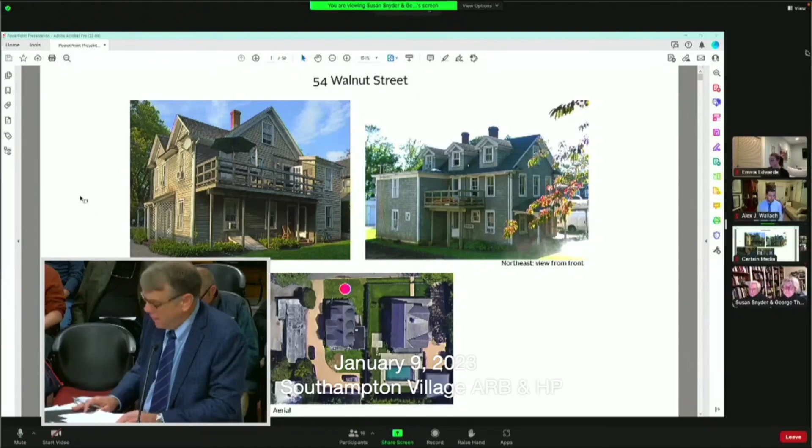We were last here in December discussing a request for a demolition. That sounds so long ago, and it does seem long ago. By correspondence dated December 5th, we had also submitted a report prepared by Civic Visions. George and Susan are here to talk about that tonight, no new information, just to present it to you.

I just want to talk to you a little bit about Civic Visions before they start their presentation. Civic Visions is a research and consulting firm that practices across the U.S., with particular focus on New York City, its suburbs, and Philadelphia. It has 45 years of experience preparing historic site surveys and evaluating sites for historic significance, with nearly 100 National Register individual and district listings. George Thomas is an architectural and cultural historian. He has a doctorate in art history from the University of Pennsylvania and is the author of 10 books, dozens of articles, and co-founded with James Marston Fitch in 1978 the Preservation Program at Penn.

Susan Nigra Snyder is a registered architect and has taught design studios and seminars for more than 25 years at the University of Pennsylvania. She's the author of numerous articles exploring the forces of consumption on urban form. Together they serve as directors of the Critical Conservation Program at Harvard University's Graduate School of Design, Master of Design Studies program from 2011 until the end of the program in 2022.

At the request of the owner of 54 Walnut Street, George and Susan have prepared an evaluation of the subject property that not only addresses the specific criteria within the code, but I must say, and I don't say this lightly, conclusively rebuts essentially every finding included in the historic analysis prepared at the request of this board. Civic Visions has concluded that the home at 54 Walnut Street does not meet any of the individual criteria for landmarking, and a demolition permit should issue.

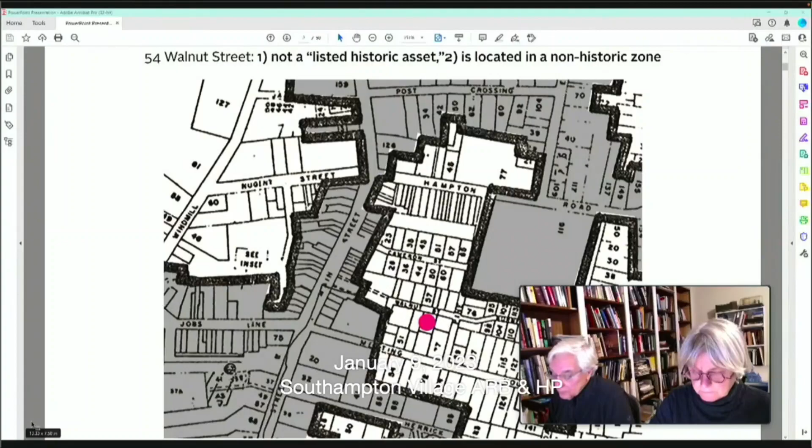54 Walnut Street is not a listed historic asset and is not located in a village historic district. The building itself is so altered that two-thirds is not original. It lacks integrity, making it unsuitable for preservation. 54 Walnut was designed without style and is not Queen Anne or any other style.

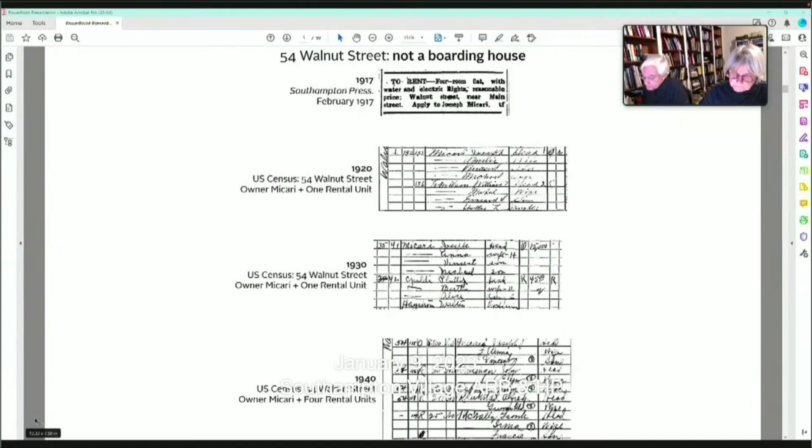Contrary to the assertions of the town report, 54 Walnut Street was never a boarding house, nor was it built as multifamily housing. As you will see, A.M. Havens had nothing to do with the design or making of the building and did not live in the building. In fact, it was the work of another builder who sold the house to Havens.

The completed house was purchased by Havens as a short-term real estate venture. Havens himself was a minor player in the local building world, a hired hand for the first half of his career, and only later took on the contractor role. The Havens family was one of numerous Southampton families buying, subdividing, and selling property. Their work has no special character that sets it apart.

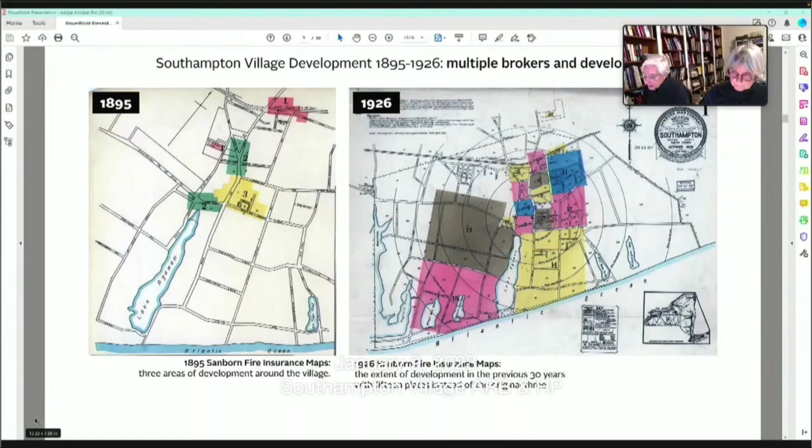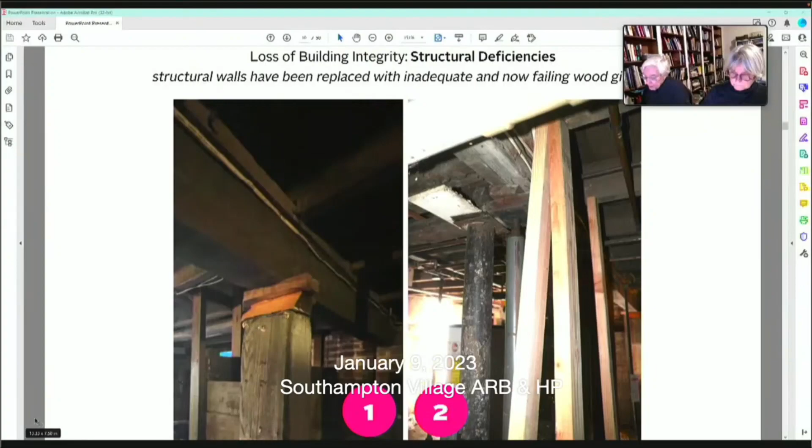Finally, we will point out an issue that is not visible from the street, but should be known to the board. The building has severe structural deficiencies, largely due to the inadequacies of the construction of the additions that undermine the building.

To summarize our introduction, this building and the people around it do not meet any of the significance criteria of the Historic Review. These standards come out of the National Register standards and demand superlatives. The design character of 54 Walnut must be special, whether historic or aesthetic.

Persons associated with 54 Walnut have to do more than exist. They must have made a substantial contribution to the history of the village. The design characteristics must be distinguishing characteristics of the style, that is, the characteristics by which we recognize the style. And finally, 54 Walnut must be more than simply a work of a designer. The work has to have significantly influenced the town, so clearly that we would recognize the designer.

Just a few words before George and Susan continue their report in terms of the standard. The core of this house, we talked about a core of the house and then some additions. Well, indeed, the core of the house is not worthy of preservation.

Havens, assuming he rises to some historic level, which I find fanciful, didn't design, live in, or own for more than two years this house. Nothing historic that he did, assuming he was a historic figure, which he is not, took place in the house. He owned it for two years before he sold it.

The Spanberg report is full of legal and factual leaps that don't hold together. The report tries to paste together a contributing structure by pieces of supposition, unfounded, and indeed now unproven leaps and claims that have no nexus to the categories required for significance. Statements in the report such as 'in all likelihood' are simply not allowed to create a rational basis for legal actions. If you like the house, I understand that.

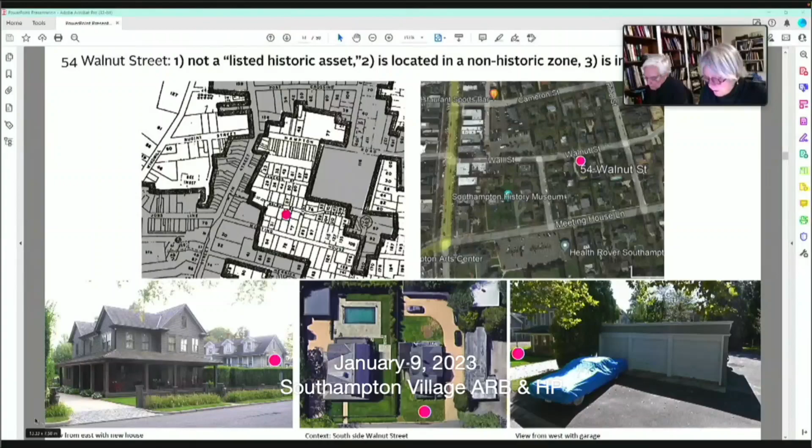The building has a lack of architectural significance. Most critically, 54 Walnut has been so extensively altered as to have lost even the design integrity of an unimportant building. We can see the totality of the alterations in this sequence of slides.

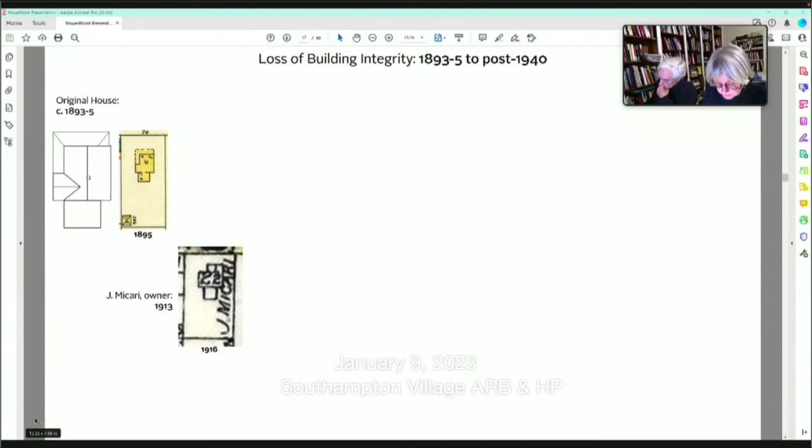The original house consisted of a front portion with an inframing porch and a rear room. The Sanborn Atlas shows it as 2 stories, meaning the attic was unsuitable for living. When it was acquired by Joseph Micari in 1913, it was still as originally built, as seen in the 1916 Atlas. Micari, to increase its rental capacity, added a large rear wing that covered the rear facade and removed the rear room, adding a third to the volume.

We can see from the census page that there are now 2 families living there. The vertical break in the facade, seen in the image below, shows evidence of the doubling of the large volume and the covering of the rear wall.

Prior to 1940, he made another large addition on the side and dramatically altered the roof, adding oversized dormers so that the attic could be used as rental space. This meant that by the 1940 census, the house contained 4 separate units. The new volumes were all textured shingle, abandoning the straightforward original clapboarding.

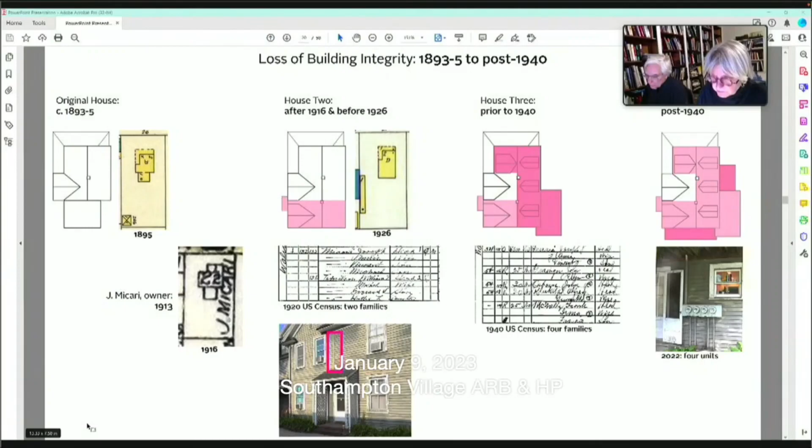Since then, the house has continued to grow and be enlarged with exterior decks and other structures extending the building footprint. The result of these alterations is a building whose facades and volumes have been so altered that the integrity of what had been a simple building is lost in a welter of volume and new material. As a much altered minor building, it does not achieve the required architectural significance.

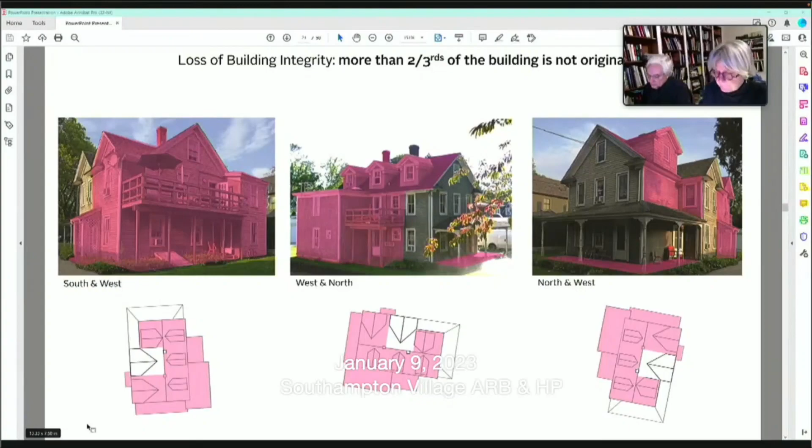The visual comparison of 54 Walnut with even modest Queen Anne cottages in the vicinity shows how unstyled this house is. As you can see in the top images, 54 Walnut has no decorative beam ends, no textured shingles in the gable, no decorative verge boards lining the gable, nor, as you see in the bottom images, does it have the characteristic Queen Anne window sash or projecting bays, towers, and other volumes. A gable end toward the street with a porch is not Queen Anne. It would be more appropriate to term the building as having no style.

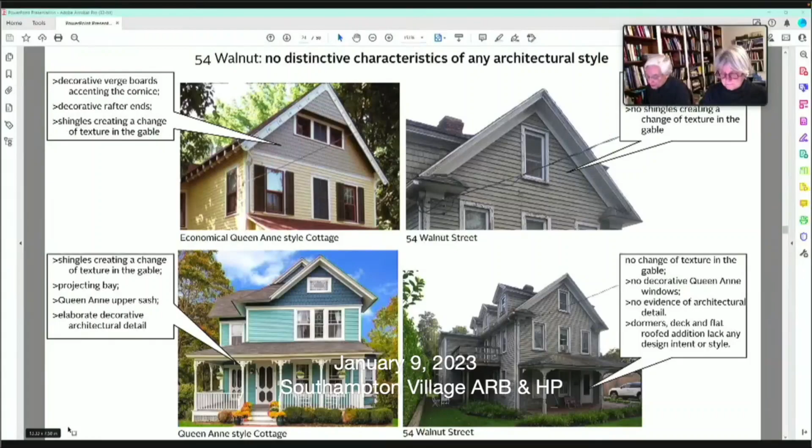The next question raised was that this was a boarding house, and that boarding houses were an important building type that had disappeared. It is claimed that 54 Walnut has significance because it was built as a boarding house. It was not. This claim is readily disproved.

As the census demonstrates, 54 Walnut has no long lists of boarders in any of its census records. 54 Walnut was not built as a boarding house, and it never served as one.

54 Walnut is not an example of the work of a designer whose work has significantly influenced an age. In fact, there is no documentary evidence that it is even the work of A.M. Havens.

Comparing the dates in the chain of title and published records of mortgages with the October 1895 date of the published Sanborn fire insurance map—let me move this so you can see it. How's that? Okay, see the 1895 date there.

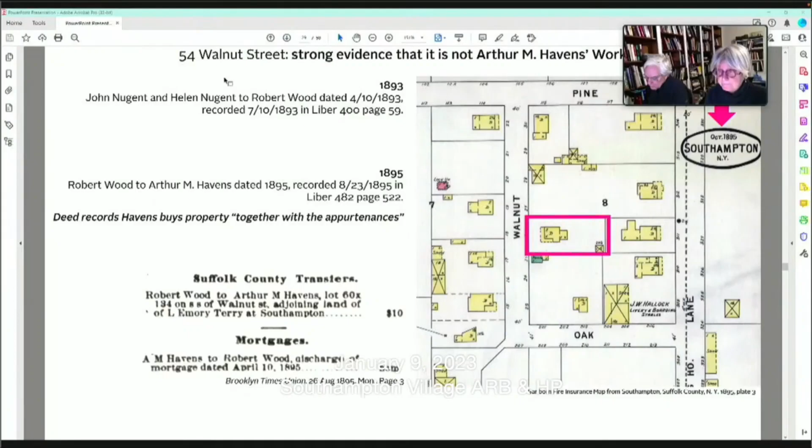John, how much longer is this presentation? I'm going to ask that brevity become your friend here. We're taking a lot of time. Probably 10 or 15 minutes. We don't have 10 or 15 minutes. Can you do what you can do in the next 3 to 5? We've already had your paperwork, and our job was to read it, and this is going very long. So if you could just figure out how to wrap it up, that would be great.

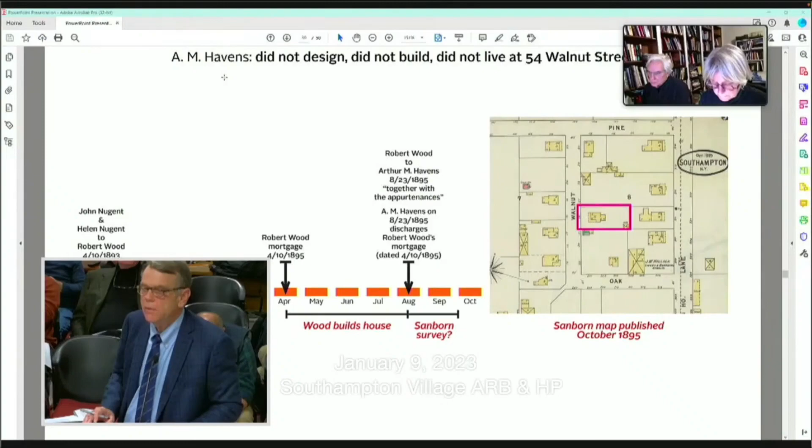Well, I understand. The issue is this facially just doesn't meet any of the criteria, and I think it's important that the experts be heard. But John, are these able to substantially expand on the arguments you made at the last meeting? These are coming out of two very credentialed people's mouths. I understand that. I'm going to ask you if you can give us the most salient facts in the next 3 to 5 minutes and then wrap up. George and Susan, if you could try to do that as quickly as possible to accommodate the chairman and the board, that would be helpful. What we'll do is we'll just submit the script, since some of this is redundant to what we heard last meeting and we've read all your paperwork. Great, thank you. George, Susan, if you could accommodate, that would be great. Okay, we will try to do that.

You can see the discrepancy in dates shown on this chronology. It is really difficult to imagine that Havens would be able to buy the property as an empty lot in late August, build the house, have the Sanborn survey it, go to New York, publish it, and issue it in October. So it is very, very clear that Havens did not build the house on the site.

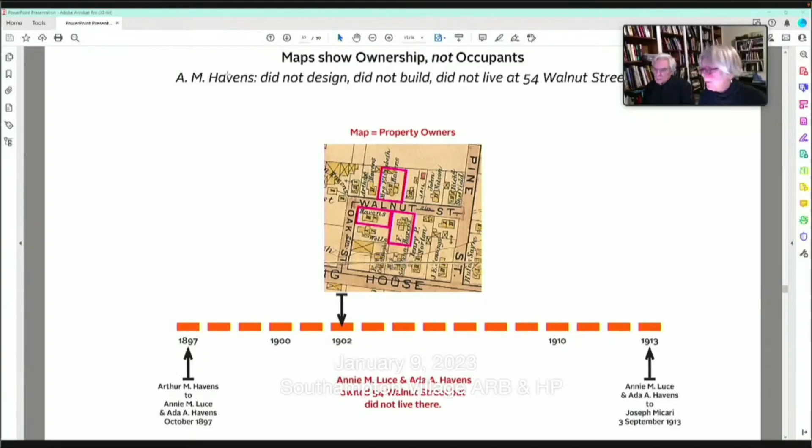That's important, because one of the claims was that Havens designed and built the house—it's gone. One of the other claims is that this is a Havens block, based on the idea that the map of 1902 shows the Havens name. We want to point out that map is about property ownership, not about residence.

The three sites outlined in red here are all rented sites. Havens lived across the street, his mother lived with him, and all of the areas labeled Havens were occupied by other people. This is ownership.

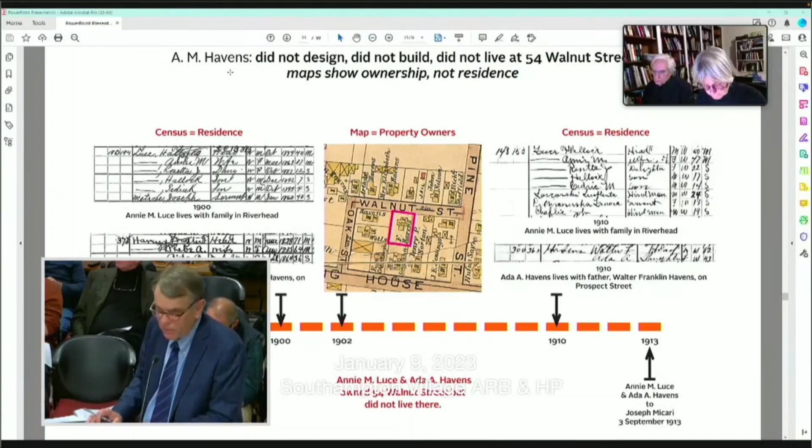Just trying to truncate or move along. The Havens bought and sold property. They weren't designers, they weren't architects. We've already covered this before, ad nauseum, and it's in your lengthy paperwork. Is there anything new that we haven't addressed in the past three meetings on this?

Well, what we'll do is we'll submit the script. You have the report. George, Susan, I know it's difficult. You have a very thought-out presentation, but if you could summarize in the next minute or so the lack of any sort of architectural significance and the lack of any historic personage, that would be great.

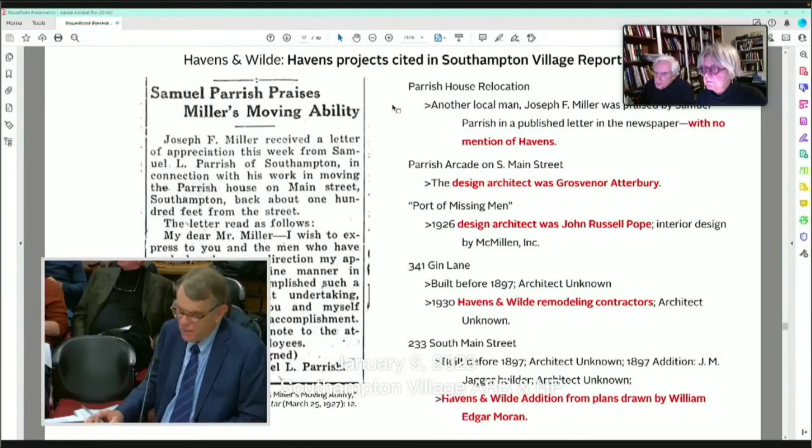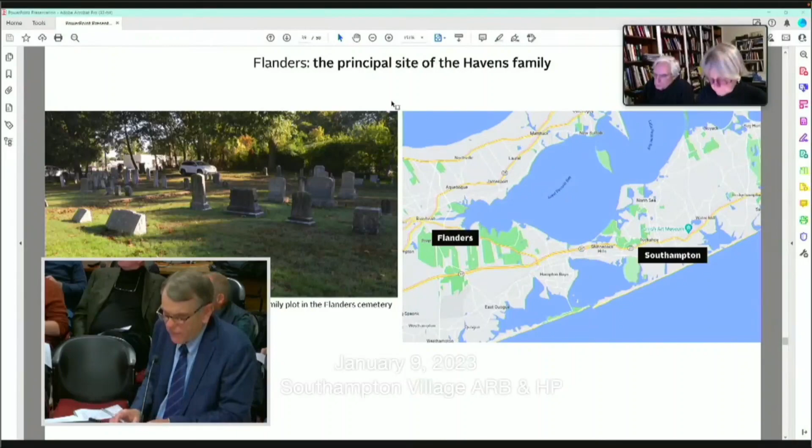There's some mention of him having worked on Port of Missing Men, a wonderful John Russell Pope building. He worked there, a lot of people worked there. It's a beautiful place, I was there last weekend. But it doesn't mean anything other than he was maybe a subcontractor, with no help in the design of it. It's really whole cloth, this report.

But in any event, we'll submit the script. What's your pleasure? We'll submit the script. Do you have any further questions about this? Let me turn it over to the board members. Do we have questions, or comments? I have a couple of comments, a few things that I picked up.

You said that the house has been greatly altered. You mentioned that two-thirds of it have been altered, which by simple math means that one-third is still historic, or at least dates back to 1893.

So there is some partial historic value, or elements that are intact. Then you mentioned that it has no style, and that any appellation of a style would be arbitrary. But a statement that it has no style is equally arbitrary. I'll admit it doesn't have a consistent style, but there is a style. So I come back to one of the sections in the code.

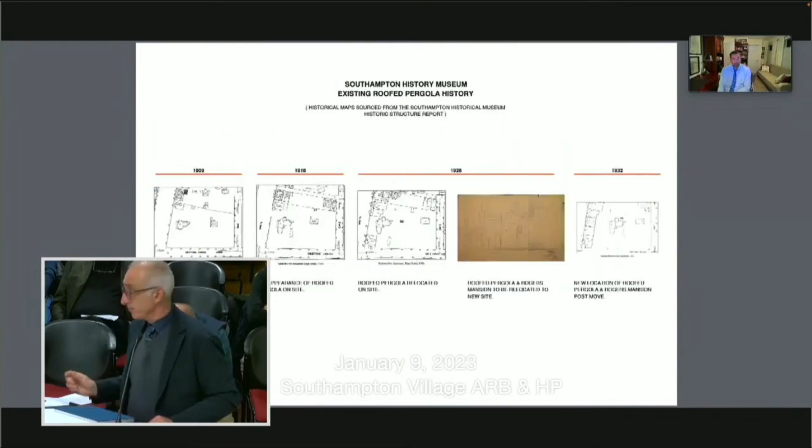And if you could go ahead on that. These are actually historic plans showing the building being moved from Main Street further into the property, and at that point the pergola that still exists today also existed, and it moved with the house.

There's the pergola. It basically has a function—we have various activities. Connor, one of our historic museum members, is very active in having various activities with the schools under this existing pergola.

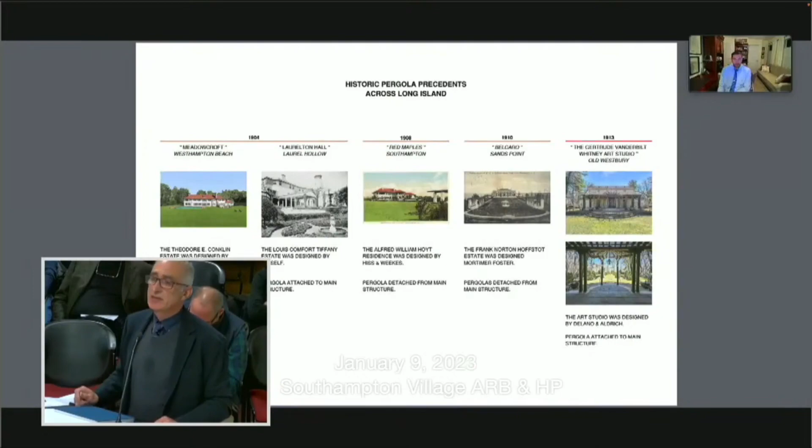These are some precedents from Long Island, primarily buildings of the early 1900s and the relationship of pergolas to them. This was a very common feature of houses of that time and region. I'd say about 60% of these properties are in Southampton. I can walk you through them individually if need be. No, please don't—let's go ahead. We've read through it and we understand.

Yes, so the existing site plan and proposed site plan show the pergola on the north side at the top of the property. If you could go ahead on that—there, you can see it right there.

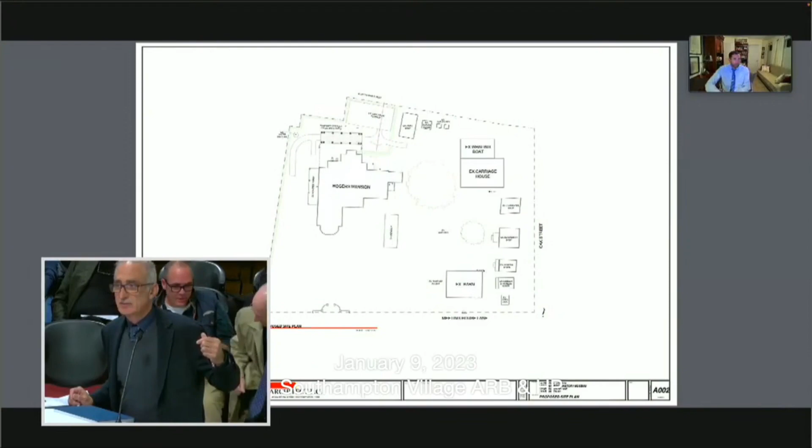I remember from last December when we did this presentation, the issue was that you guys had already built what was called proposed, and the sidewalks and brickwork to be covered by your new pergola already exist. Correct, it already exists. So the real question doesn't become about elevations or proposed—it becomes about this pergola specifically. Correct. Okay, if we go one more.

I want to show you—keep going to the elevations. So this is the existing west side elevation with the pergola. You can hardly see the pergola here; it's on the left-hand side in relation to the building.

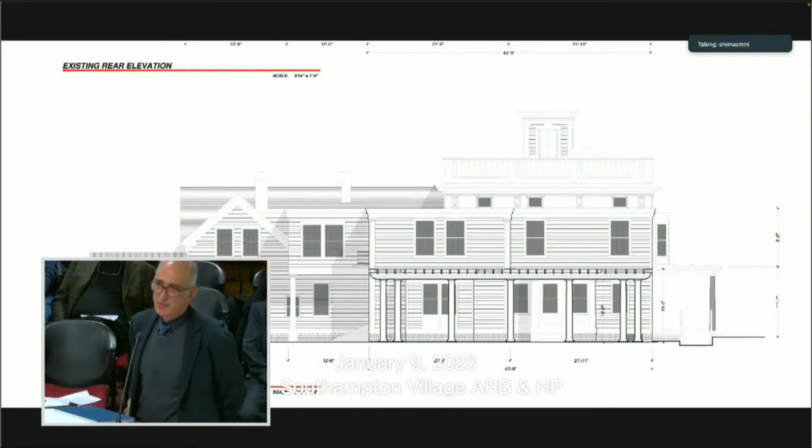Can you take us through color and materials, please? The top is cedar, and the columns are polystone—those are the pergola's finishes. We're not painting the cedar; it's left natural. That's about as far as the materials go.

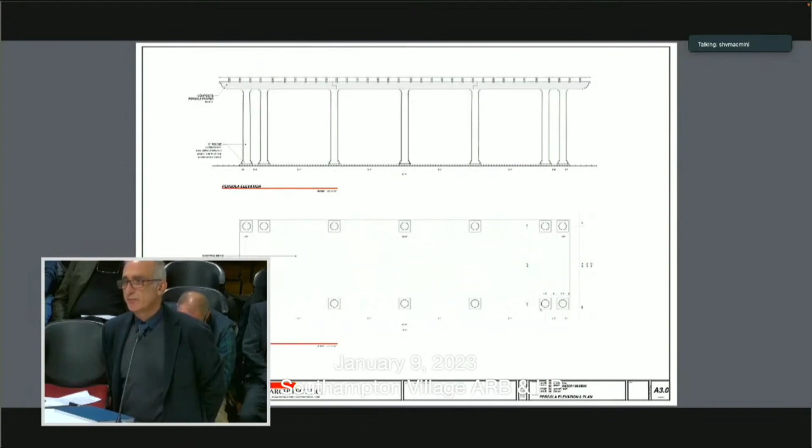On the brick paved walk, we're introducing minimal lighting—just 4 downlights in each of those bays. I've submitted specifications on those, which adhere to night sky restrictions, primarily lighting up the path and nothing upwards. Okay, hang on.

And the joists, what's the material for those? Again, plain cedar. Plain cedar, okay. Everything cedar. Okay.

All right, I'm going to turn it over to board members for comments or questions now, since we went through this in December and were looking for additional information. Board members, do you want to start? No questions.

Yeah, I still object to the pergola. At the last meeting, the representative of the museum basically said the purpose of installing the pergola was primarily for commercial purposes, in order to maintain the viability of the museum. And in my view, commercial needs take a distant second place to architectural criteria.

So when I look at this pergola, it's a good 60%—I know you showed the drawing—but it basically goes across the entire main part of the building. There's a wing to the east, but it covers the main portion. In terms of the entire frontage, it represents about 60% of the length of the house, and to me that's more than a casual pergola for sunning or whatever.

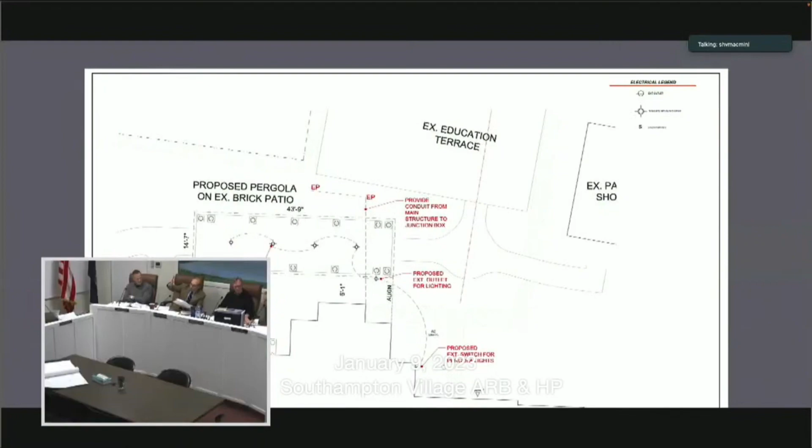So I don't know if Charles can pick it up anymore, there are no more cameras here. But on the layout, the house on the northern side of the Rogers Mansion, along the alleyway that goes between St. Ambrose—there is a square, already bricked, maybe 20 by 25.

Not the proposed terrace, no—it already exists. Okay, so what you're saying is you'd be happier if we moved it to the existing terrace, to pull the pergola farther away and design it as a unique structure versus mimicking the history in front of the house. Right. Thank you, that's a good summary, Mark.

No, that's a question. That's why he's chair. No, that makes total sense to me—let me propose that question to you.

Because it does feel like we're taking an existing element from the '20s and just repeating it in the back, but you have another opportunity—your existing terrace, which is actually wider and has more square footage. Is there a reason why the covered area for entertaining and commercial purposes couldn't be pulled back farther from the house, over the terrace, versus where you've located it? Yes, there is.

To go back to, even though this is not the purview of the board, the function and use—specifically calling it commerce—our commerce at the Southampton History Museum is history. We have various events going on as far as educating the public, students from all different ages, and each of these courtyards has been designed for specific activities. Yes, we have different events two or three times a year where larger parties or galas are invited, but between those we have extensive activities, primarily school activities, contributing toward education of history. Each of these spaces is defined based on those needs and sizes. If we were to move the pergola further north, we would be eliminating the capacity of that space up there.

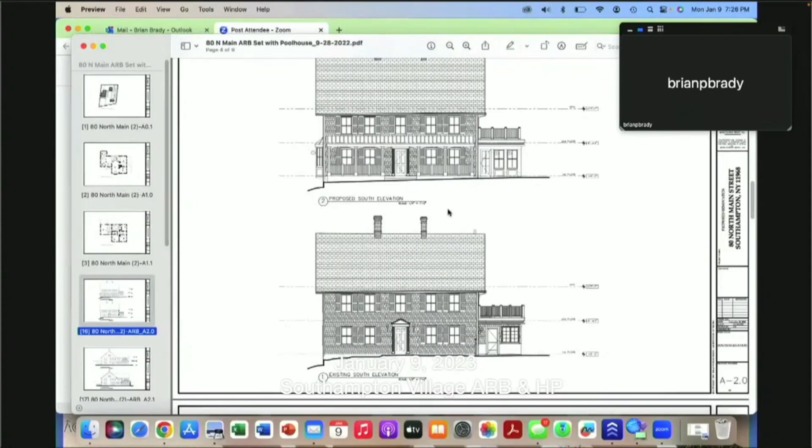This looks like the original proposal. In Sally's report, she had a major objection to this front porch because it was added at a later date than the original house, and given the original house's orientation, it would never have had a porch on the south side. So we agreed to remove it, and basically we're back to this being the front facade.

I just want you to know that all the windows in the house, there are some that are very, very old, and just a few, and then there are some old windows, and we're trying to reuse every window that's there.

The shingles that are there, we're hoping to reuse. We found some evidence, and Chris Gaynor, the builder, is here and can talk more about this if you're interested, but there's evidence that the house was originally painted white. So we're proposing to return the house to white, with the original shingles matched where we need to, and take it from there.

You can see on the front facade here, this area was a bad little sunroom that was added on. We want to keep the actual mass of it, but clean it up and make the windows actually match the windows on the front facade, and redo the railing. Right now there's a stair going up to it, which we'll get to at the next elevation.

Do you have a plan to build out that pediment opening, or does it stay flat to the front facade? Right now it's old, it's there, the door needs to be replaced. We're trying to work with it, want to keep it simple. If we can work with it, we will. If not, we're going to do something along the same lines. Great, thank you.

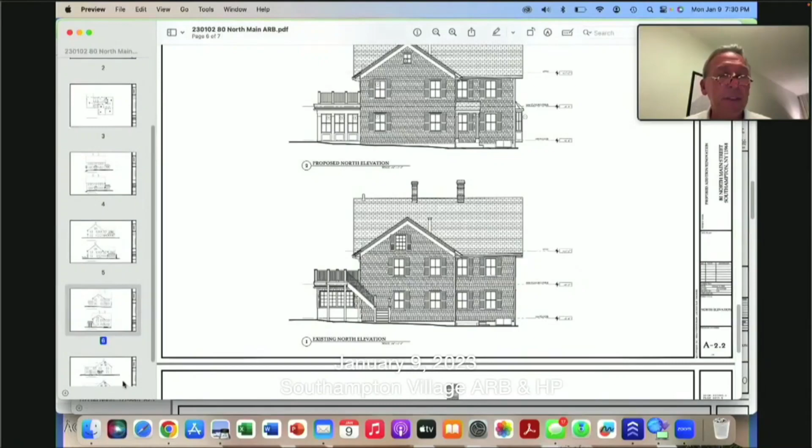This is the North Main Street elevation. These windows, although very old, obviously were added at some point. It kind of looks like a storefront from North Main. So what I'm proposing, since the address is 80 North Main and this is becoming the front of the house, is to take these 4 windows and turn them into a bay, which would reduce their mass. They are old windows and I'd like to reuse them, then create just a small, simple porch for this area.

These days we all get packages, and this is where they'll all come. So we want to have some sense of a covered area since we are removing that porch in the front. Everything else is basically staying the same.

The 4-window gang on the existing north elevation that you want to make into a bay—could you tell when you went through the house that those are original in that configuration, or were they altered over time? They were altered over time. I would imagine there was just one window there originally.

In Sally's report, she had no objection to that conversion—no objection to the bay or the porch. Her only comment was she was fairly adamant about the attic windows remaining as is. Considering they are the original windows, I think that's worthy of consideration. They should be repaired in place as they are.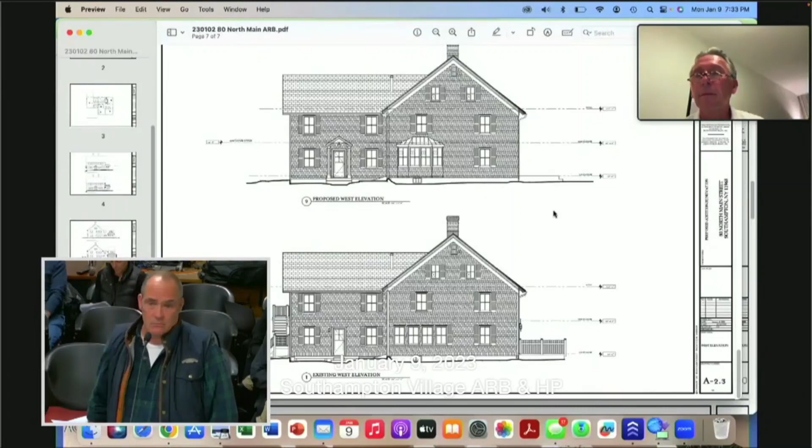May I? Chris Gainer, C. Gainer Construction—I'm a preservationist by definition. I can say that given the age of this house, if you want to see the shutters, take a look at the Halsey house on South Main. They were probably wood, board and batten, nothing to write home about. As the Charles Halsey family progressed in stature, they made changes to the house.

Eventually—it's kind of funny, earlier Havens and Wild was mentioned—the Wild family lived here and made a lot of changes to the house as well, and the Duriers. So I can say that those 4 windows in the front were added during the Havens Wild time, and the attic windows—actually, I was in the attic with Sally when we discovered the age of the windows. They will go back to my shop. If they can't be salvaged because of rot or whatever, they will be recreated perfectly and reinstalled.

I did this in a house in Sag Harbor a couple of years ago where we took every window out and turned the library into a window factory, and we rebuilt them, and nothing changed other than the fact that they worked.

So would board and batten shutters be consistent with the original look? I don't think so—the problem is the house has changed in look drastically. I don't think putting it back to the way it looked when it was built originally would be appropriate. The shutters would have been very rustic, more for protection from wind than decorative. That's why I think having working shutters on a house of this age would be appropriate instead of just an ornamental shutter.

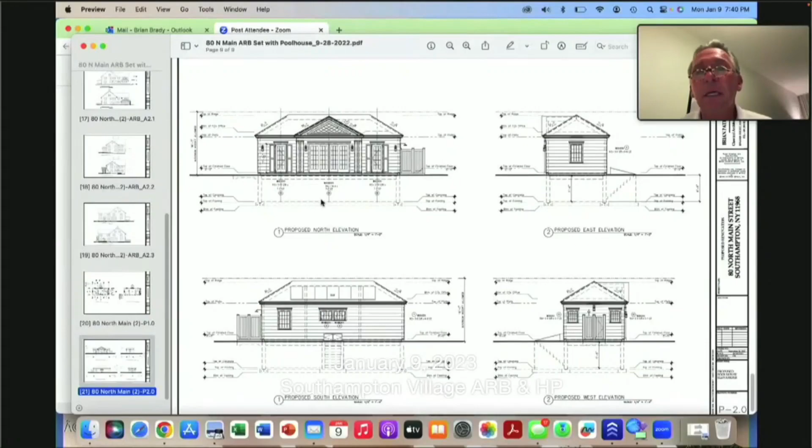Do you have a hip roof on that house because you're up against any kind of pyramid situation? Yes, we are, but it was also done to try to diminish the mass of the pool house. I'm trying to keep it as simple as possible. If I just did a gable roof on there, the mass would get a little bit bigger.

All right, board members, additional comments?

I don't know, the more I look at it, keeping the original 4 windows, or what would have been the 4 windows on the west elevation - some might say that lacks any design or style, but I think it's more in keeping with the history of the building.

Jane? Yeah, I would agree. I find the bay window somewhat offensive, just tweaking it into something it's not. I also want to mention that if it was originally painted white and you want to go back to that original, let's find out what the original shutters were, because I think the black and the white looks really modern.

The black shutters with the white - do we think there's any shutters of which a scrape test could be done? Those aren't the original shutters. They're not the original shutters. Not the originals. Okay, not original shutters, and there's no evidence that there were shutters when the house was built.

Jeff, anyone else? Okay, before I go to public comment, I would say if we follow the rule of trying to honor the original window openings, I think if we took the bay window out and back to the original openings, it would be more akin to the actual history of the house. Other than that, thank you for removing the porch, because that was my big objection as well, Sally aside. And I think you've done a good job of taking the pediment front of the house and adding the side door to reorient the front of the house.

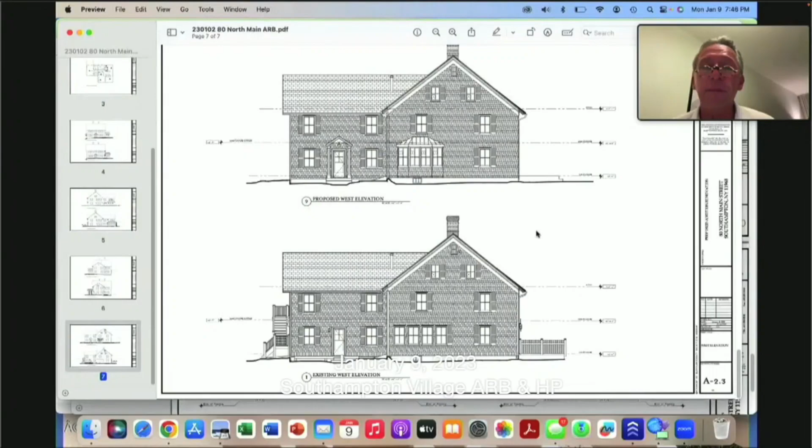If you could find out for us when those 4 windows went in, that would be useful too, because it could have been 1973 or it could have been 1910, we're not sure. The windows are much older than that. If they're much older, it'd be helpful to know if you could just estimate, because then they become part of the architectural history of the house. We'd like to take that into consideration.

So I move we accept the applicant's request for an adjournment. Do I have a second?

Second. All in favor? Did we ask for public comment? I think we did. Okay, sorry. All in favor? Aye. Thank you, Brian. Okay, thank you. Did you vote, Jane? I did, yes, I did say aye.

I can't hear her. All right, before I do that thing that I always do and file away my agenda - her mic needs to be closer. You're not used to us.

All right, so I believe next we are up to 99 South Main Street, which is the demolition of an existing house and pool house, and the construction of a new house at 99 South Main Street. That she's not voting - because they can't hear her. Good point.

Is the applicant here? Searsucker 3 LLC. You need help, Jeff? You got it, I need help. I can get by. Are there any hands in the back? I think the architect's on Zoom - oh, there he is, okay. Hi, if you'll state your name and introduce yourself, please, and then we can go through your presentation. Frank Greenwald, architect, 295 Main Street, Sag Harbor, New York. I'm the architect for the project.

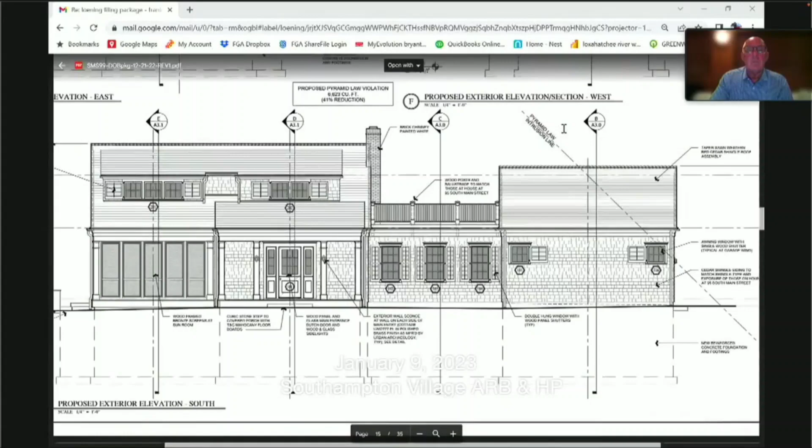Okay, board members? That is my recollection. I also believe at the last meeting you hadn't actually done the application for demolition, wasn't that correct? I think that's correct, yeah - now we're applying for that, the application for demolition did come through. So my recollection is that was the one issue left outstanding. For my new board member, Jane, did you have any questions? I think it was going to be the same footprint as the house that's there? Yes, same footprint, correct. Okay, any other questions? No, I'm good, thanks. So I'm going to move, since they eliminated that issue.

Is this a certificate of appropriateness? Yeah, written decision. I'm going to move that we - do we need public comment? Oh sorry, public comment - we do, I forgot about it. Okay, then I'm going to move we close the written record for decision on 99 South Main Street.

Do I have a second? Second. All in favor? Aye. Great, thank you very much. Thank you.

Okay, so next up we're going to move to new matters, and the first matter is 25 Willow Street, the addition of existing wood frame house and garden shed. Is the applicant here or online? Kevin Bone? This is one that I have not received affidavits for.

Is the applicant here? Looks like they're joining on Zoom. Okay. You can't submit an affidavit by Zoom, can they?

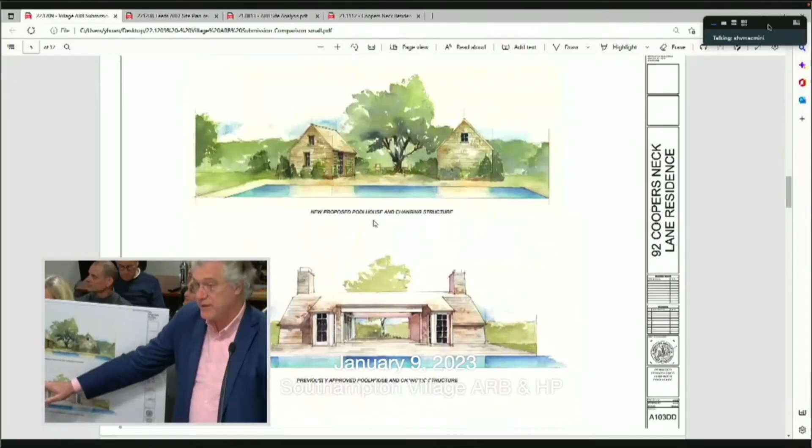We call it the orangery. Below is what was approved before. It was a large building with a breezeway between it. We divided it into 2 smaller structures, which is much better. It's about 150 square feet smaller, more as though it was there before, in red cedar shingle like the existing house.

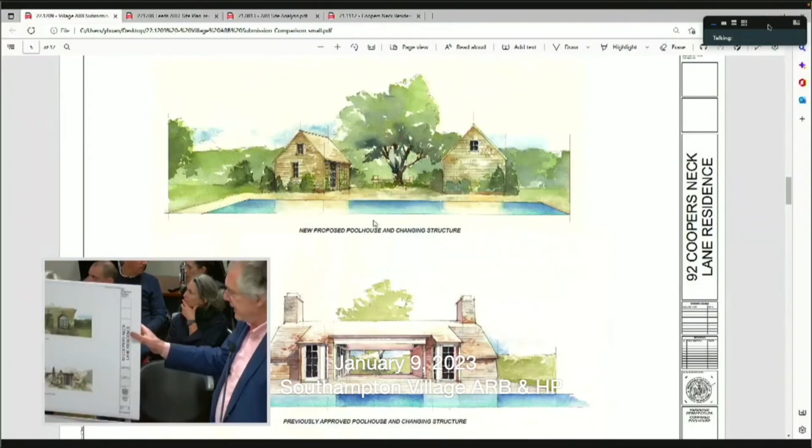I just have one question before I turn it over to my board members. In the original drawings, one of your accessory structures showed cooking. Was that removed? Yeah, it's been removed. Have any corrected plans been submitted? Yes. The correct ones are the 23rd ones? Correct. Okay, great, thank you.

Just to clarify, all the structures will be in red cedar, even the garden building? Yeah, it's a watercolor, it looks like stone, but it's cedar shingle. The shingles do a sort of voussoir around the opening like stone might, but it's actually all wood. There is a keystone, but that's cedar also, not a shingle — that's actually cedar trim. Interesting, okay.

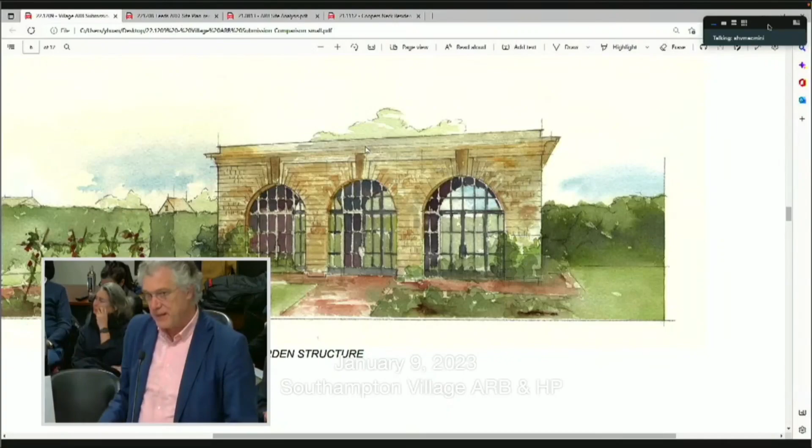And the window material is? The windows on the pool house are wood. The windows in the garden building are going to be gray painted steel. Okay.

Compliments, very nice. I was going to say, pleasantly surprised. The change in the pool house changes the entire look of everything. They've had time to get into the property and relax a little bit. I think we agree.

How old is the original house? The original house is 1898. And was it an Atterbury house? I don't think anybody knows who the architect was. No. Okay. I wish it were an Atterbury house.

Do we have any comments from the public? You're doing a great job. I'm going to move we close to written decision, 92 Cooper's Neck Lane, for approval. Do I have a second? Second. All in favor? Aye. Thank you very much.

Okay, moving right along. Next on the list — so that got submitted to written decision? Written decision, right. Okay, good. Next on the list is 92 Post Crossing.

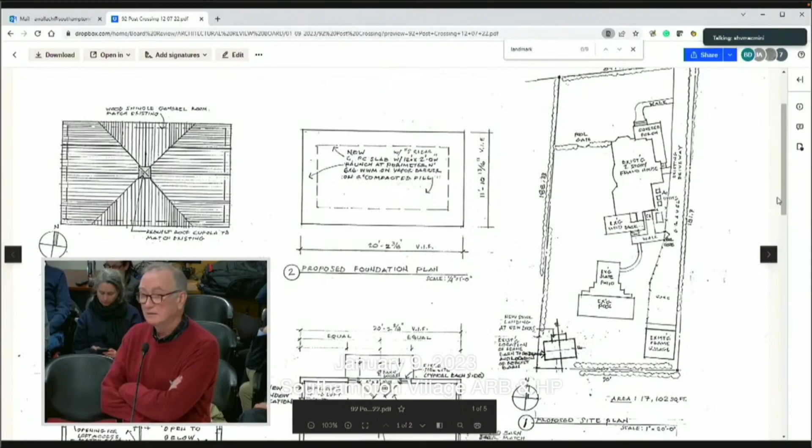Board members? No, it's in pretty sorry shape, no doubt about that. No objections. We're trying to save it before it just dissolves into dust. How very Frank Lloyd Wright of you.

Did I ask for comments from the public? I have no objection. I think it's basically the same thing, you're just building it from new.

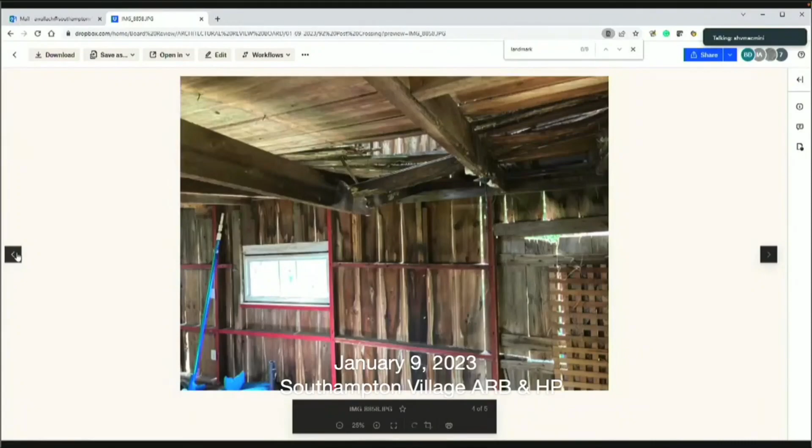So if there's no objections, no comments from the public, I'm going to move we accept and move to written decision. I do have one comment.

Any exterior lighting, because this is existing? There's one light over the door, the barn light, that's there. That's existing, yeah, we had that, which is in the original plan, the previously approved plan.

We started in September on this job, and we're hoping to get it done by next summer. I'm going to move for a decision on 92 Post Crossing for the demolition and rebuilding

of the existing barn to match existing. Do I have a second? Sure, I'll second. All approved? Aye. Any nays? We are approved. Thank you.

So are we done, or do we have to wait for a decision next week? I'll have a decision for the next meeting. Okay, it goes to written decision, so we don't vote on anything written until the next meeting. I'll be quick about it.

But you're done, more or less. As much as we love seeing you, you don't have to be here for that. Okay, so I think that's the end of historic.

So I think we're going to move on to carryover matters from non-historic, and next up is 46 John Street, the very famous 46 John Street.

When it's over, you're going to miss us. Round 6 or 7, right? Okay, please introduce yourselves.

Good evening, Heather Wright for the applicant, Jennifer and Nathan Ondiak, 30 Main Street, Southampton, New York. I'm here with Steve Liu, our architect. I'm hoping to make this quick for you this evening.

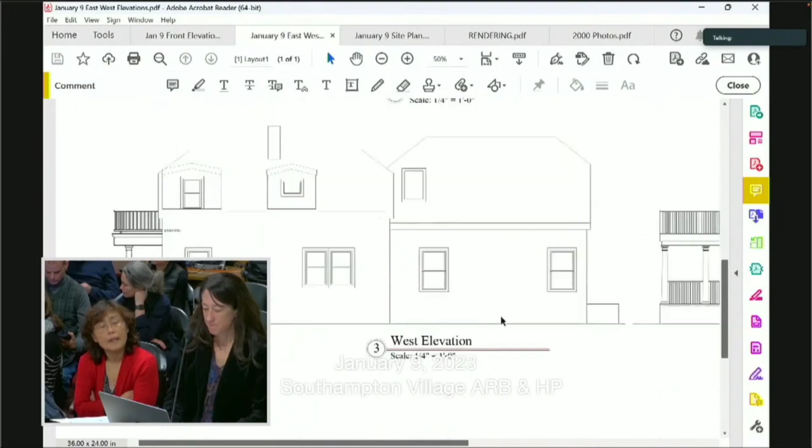And then if I show you the- let's see, which one is the first one? This one? Yeah, the steps used to protrude past the house, so we brought them in.

All right, is that the end of your presentation? Well, I'm happy to answer questions. We went through a lot last time, and the time before that, and the time before that.

Okay, so board members, I'm satisfied. Yep, no objections at this point. Come a long way, a long way.

I know the house, and it looks like it's going to be very similar to what was there. I know this has been a very long process, but I agree. I think we've brought it back down to where the main house now retains the character that people in the neighborhood really cared about, which is a circular porch. It's smaller, but to me it maintains the homage of that.

So any public comment?

Okay, therefore I move that we accept- word this for me, what am I moving here? Approve the application. I move that we approve the application for 46 John Street, the demolition of existing front porch and construction of a proposed side entry.

Do I have a second? Second. All in favor? Aye. Great, thank you so much. Thank you.

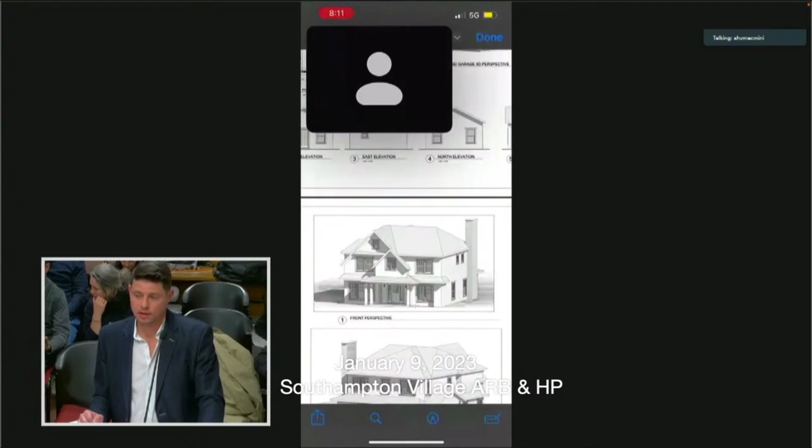Hang on. So the plans that I have, dated November 30th, the front elevation has a single gable. That's- at the last meeting we didn't present that. But you submitted them, because I have them. Late November, not for the- what was it, December 13th? Whatever it was, that December meeting, we didn't present that. These both are dated the same date, but two different renderings.

I'm confused. We attempted to clean and organize the file, but I know we can't do that, so I've tried to simplify it, because I know last time there was confusion as well in the file. No, I mean from the building department standpoint, these are- oh, those are current renders, yeah- but they're two different renderings. Let me see, one has four- and that one has been... Oh, yeah.

Those, okay, but... of the drawing, same? So explain to me, the drawing you submitted dated November 30th, what happened to that? Because that came back- that's a simpler house. Came back, declined, did not want to do that. Oh, this is the board and batten.

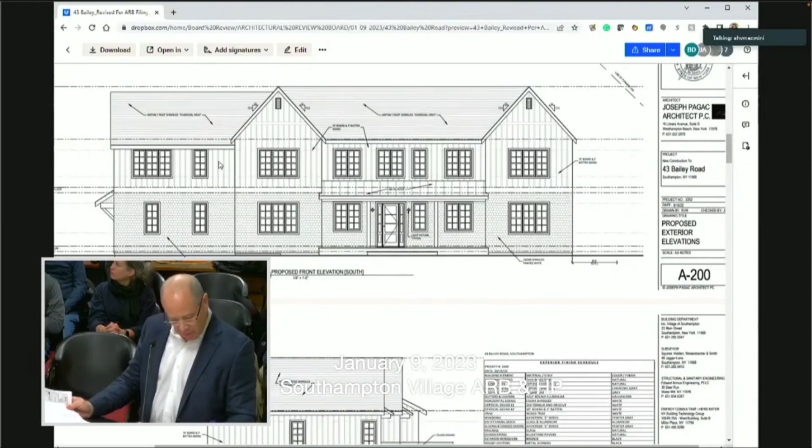We addressed everything that we went through on the December 14th meeting and have made the corrections. On A200, we have removed the shed roofs over the windows on the front of the house. To the left side, the garage shed has been secured to the side of the building properly.

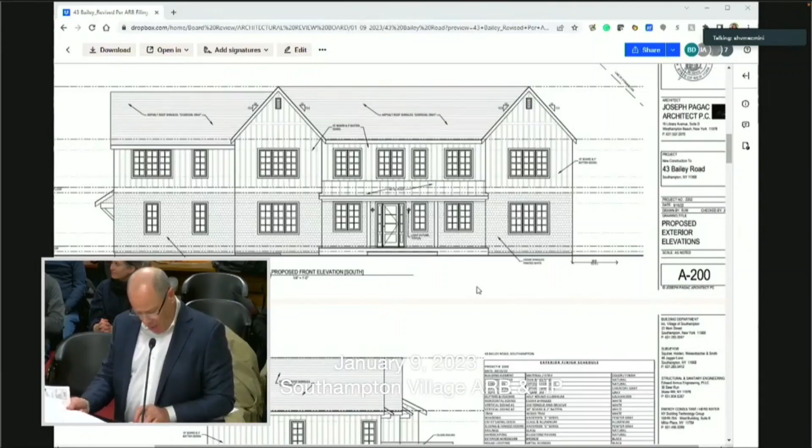Not floating. We found the nails, we nailed it up. The front roof over the front door has been matched to the overhang of the roof above to give it symmetry and cohesion. And if we can go to drawing A010, the recessed courtyard on the east side of the structure was enlarged by about 3 feet for mechanical equipment, so we could put the mechanical equipment below grade.

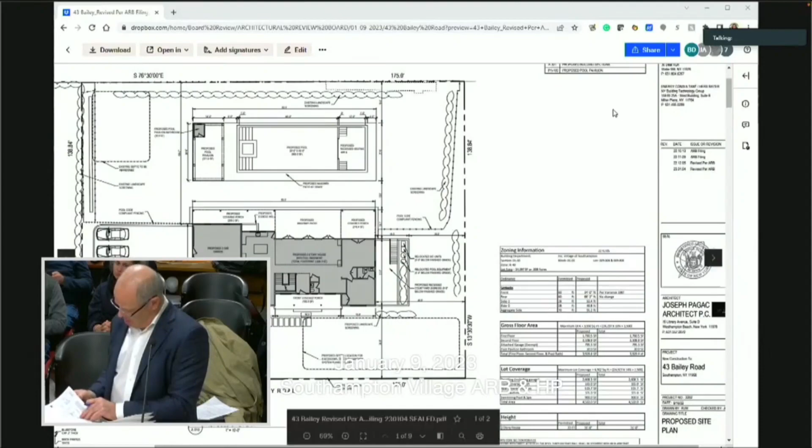The pool heater, the air conditioning condensers, this will shield it from the street and shield the noise. I'm almost done. And then on the garage doors, we specified the lower panels to be completely opaque. The top level panel, shown back on A200, that's the elevation of the doors. The top one will be a white laminate glass that is opaque but will transmit just 50% of the light. And we took the access door, the pedestrian door, and made that solid wood.

Alex, can you show us the garage? I think it's up, A200. There you go. So the garage, the only glass on that is the top level, and the others are now wood? Yes, so they're 100% solid. No, the bottom is still glass, but it is a completely opaque glass.

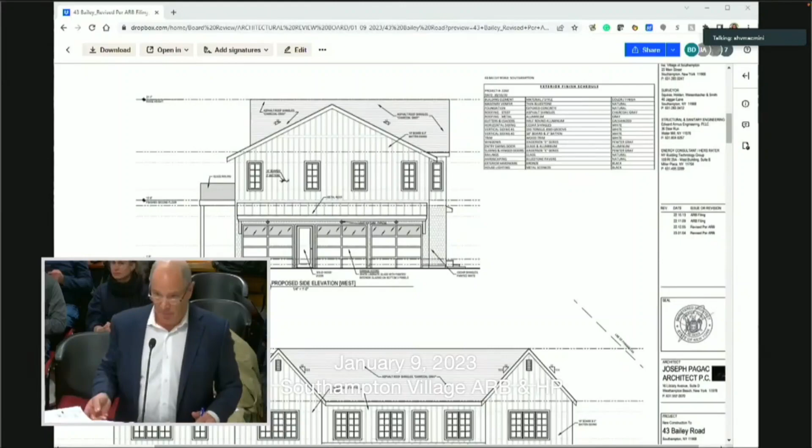I have a sample for you. And that's not what we suggested. But it would still glow. No, it will not glow. You said it had 50% opacity, so it will glow. No, the top has 50%. It doesn't work for me.

I passed it, I can pass it over. There's no sharp edges. This is the top. That is completely... it's a blackout material, so it's a 3-pane glass, a tri-pane. It's not ugly, but okay.

We also, being an engineer, I took this a little step further. Now, these doors go up? There's 3 garage doors or just 2? There are 3 garage doors.

Well, I'll give it to you that it's opaque. And we did a calculation with the... this represents the field of view from the garage door to Bailey Road, the blue. I'm sorry, there should be 4. That's okay, oh, there you go.

What's represented there is how much space you see on the street. It's only 34 feet. And a car going 20 miles per hour, which I don't know any cars that go 20 miles an hour down the street. Unfortunately. Yeah, exactly, it's a narrow street. I would love to put speed bumps in. Good luck with that. I'm not going to go there.

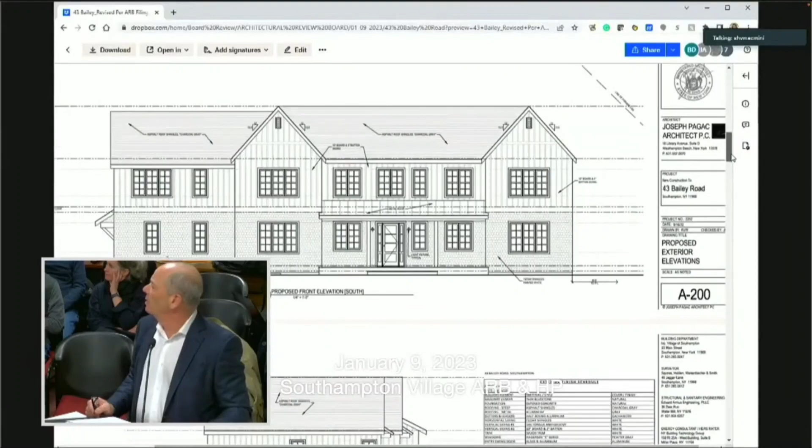Go ahead. The material on the front door - I know there was some discussion last time, at least in the minutes, about switching it to perhaps a solid door, solid at the bottom. Can you bring the drawing up a little to show the front elevation? It should show the bottom pane being solid.

By bottom pane, you mean the bottom quarter of the door where there's 3 clear panes of glass above it? Yes. So you're matching that in your side lights? Yes. And we did make the door on the side of the garage solid.

And we covered light emissions at our last meeting about privacy for my neighbors. It's a nice street, we all know each other quite well.

Did we see a sample of the pewter gray windows last time? The windows, did we see a sample of the pewter gray? Yes, you did. It's the Andersen E Pewter Gray. I can bring that in again if you want to see it again. No, if we all agreed on it last time, I think we did see it.

John's in the hallway, he's letting me go solo. How did you manage that, thank God. Snacks. Jeff - a way to any man's heart.

It's a different design, it's cleaned up. It's also a different design than traditional. But I think it works. I think the various elements work. That's why I asked about the window - there's so many windows in the front, anything that's dark would look like a tic-tac-toe board.

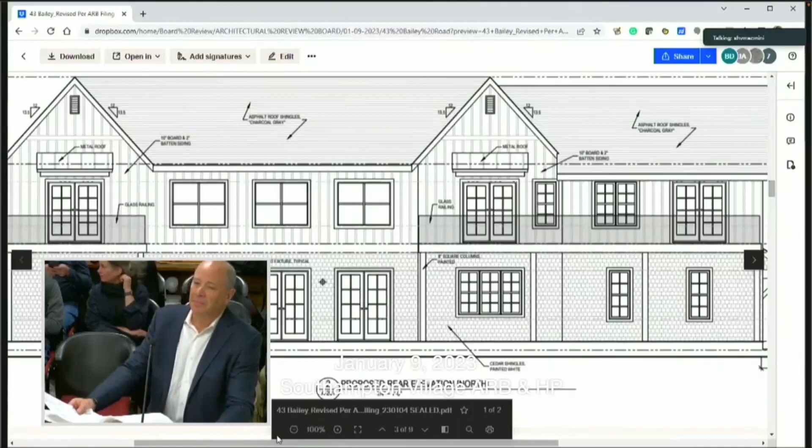I think it should be there. A102? No, 201. Keep going. Maybe you better just - there, got it. A301, I'll go back the other way. Oh, here we go. That's a lovely sound, sorry. Yeah, these aren't correct either.

Jane, do you have my comments drawn in? I can draw them in if that's - well, actually, I have very good... no, that's fine, but it does have to be signed off by the architect.

Is Jane commenting? No, I'm fine. You're an engineer? Yes. Uh-oh. I think he can alter them. I'm not licensed here. Then he cannot alter them. So all we need from you, sir, is a set of updated plans correcting those windows.

Is everybody else okay with the garage doors with all the glass? Is everybody okay with the clear front door? No, the bottom will be - yeah, understood, I'm calling it a 3/1, you've got 3 clear panels and 1 solid quarter. So in the top 3 there'll be mullions. I'll call Joe, he'll do it now. He's on standby.

All right, well, we can approve it with the stipulation pending the receipt of updated documents. That's right, Alice, tomorrow, that's fine by me.

Is there public comment? Or did I ask already? I'm new at this. All right, thank you, any other comment? Nope. Okay, then I'm going to move that we actually accept, what is my... so I don't get this all correct here.

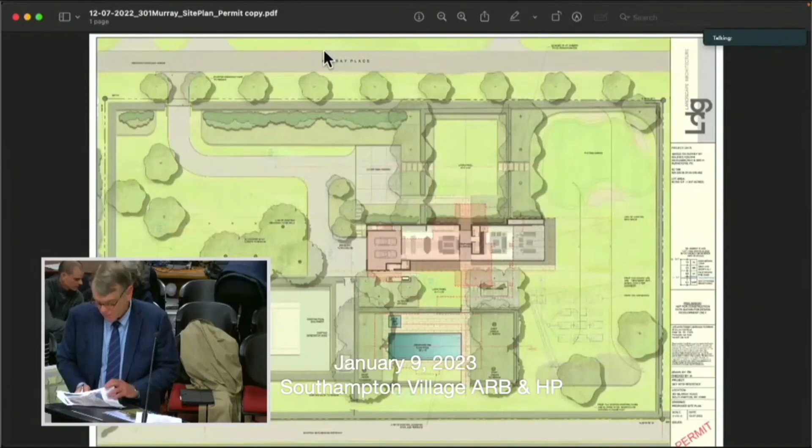I'm not even going to go through them all, you'll look at them and see there's a lot of variety. Just the first couple of images: there's the house, which is a Stelle Lomont Rouhani house, right in front of it is the waterfront house, and to the east is the Jacobson house, a Tim Haynes design. The other homes are all, you could argue, traditional forms with gables, but they're clearly not. There's a little of everything down that street, especially the house that used to be a chicken coop. We know the street well. All right, I'll let them discuss.

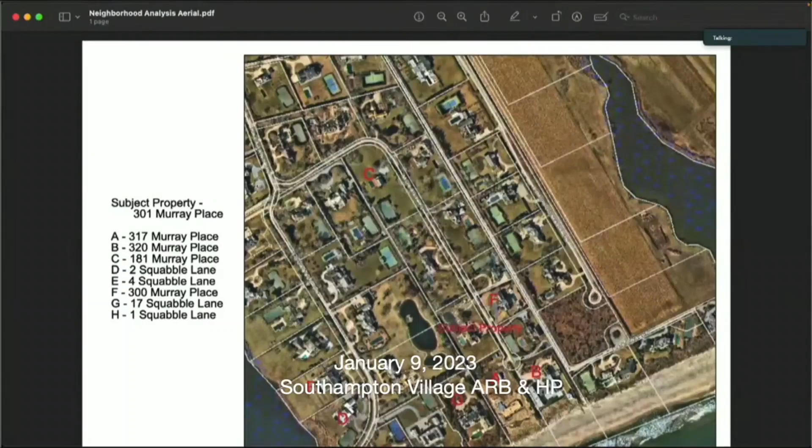Please introduce yourself. Good evening, my name is Jonathan Subject, I'm with Stelle Lomont Rouhani Architects. And with me is Martha. If you could just go to the microphone for me. Hi, my name is Marta Branda, I'm with Stelle Lomont Rouhani also.

I think we'll maybe start with the rendering. If you could present to the screen drawings as much as you can, because those are going out to the public. That's fine, you can start with the site plan. So the application before you is to demolish the existing residence and build a new residence. I'm sorry, do you want to bring the site plan back up?

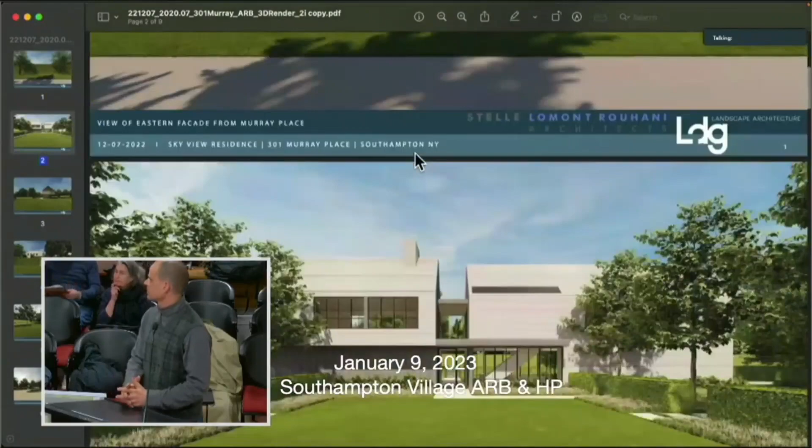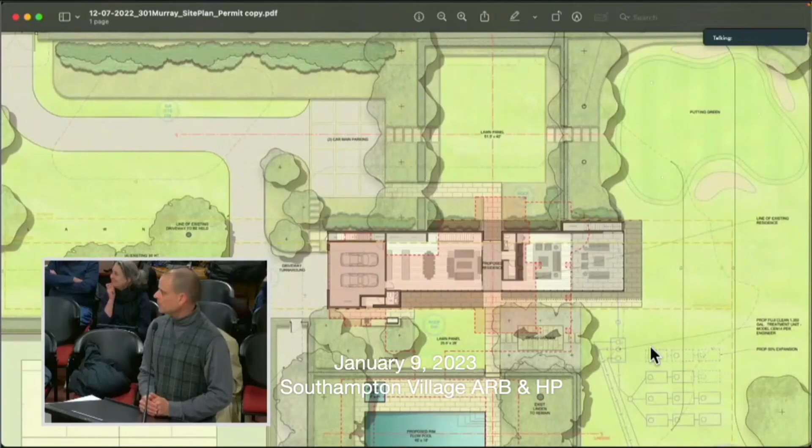So what we're proposing to do is bring everything back into conformance with the current code. That creates sort of a longer, more narrow house. We're also proposing a new driveway; the existing one was recently redone. Parking is in the front.

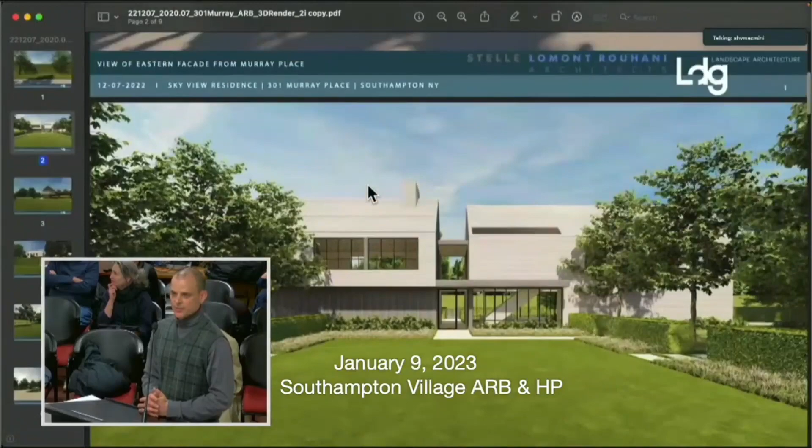If we can go to those renderings, starting from the road view, the first one you had brought up. The hedges—this property is very private, there's an 11-foot hedge that wraps the entire property. So this is as you're driving past, directly east of the residence. As you come down the road, there's really no view of the house from the road, this is just inside of that hedge. This would be the east elevation. There's limited glass on this side, keeping with the existing architecture, though we wanted a little bit of glass as you enter, presenting the entry with a nice stair. But most of the east facade on the lower level is solid. I do have some materials here.

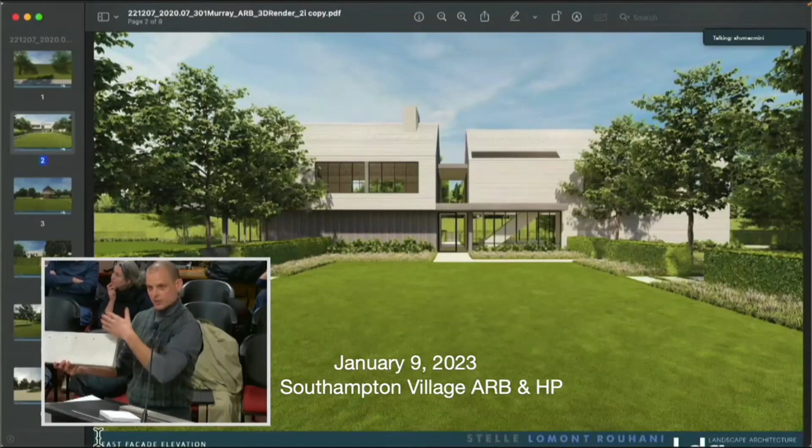So we're proposing a few different materials on this house. If we can go back to that entry view - on the right-hand side, the right form, we're proposing this, it's a clay tile. These actually stack, they're handmade, and then they would be overlapped in a series.

You guys want to take a look at that? It's actually interesting how you just described that. Can I see that? It's actually really nice, it'll have a lot of character because they're...

Yeah, I don't know who your steel worker is, but good luck with that. That's to be determined. That's heavy. But it does start at about a 3-inch height, so it allows it to feel light. That's how heavy it is.

And then to complement that, on the other side, we are using ipe. Both of them would be done in a rain screen type application, so the idea is to just leave it, let it weather naturally, and those two would complement each other. And then also in the landscape using a nice limestone, that also complements that.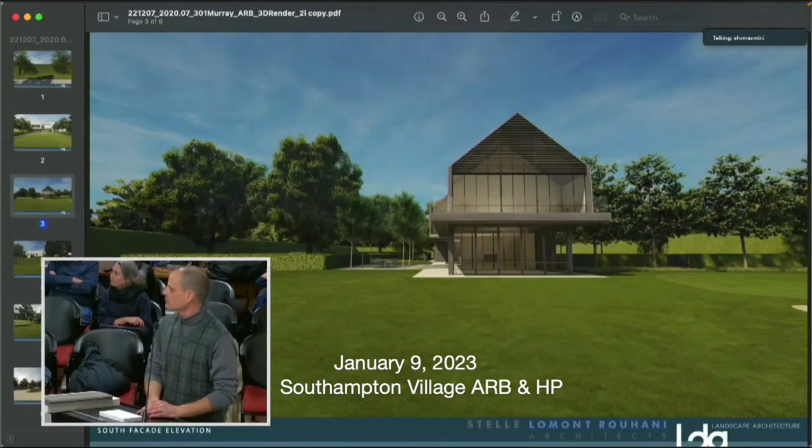Oh I see, okay, the next rendering - so here you have a south view. On the lower level, what you would see is actually a screen room, so that's why it's mostly open, it opens up to the site and those would be allowed to let the breeze in. The upper floor has a small balcony with a glass handrail, and the south is the beautiful view, so that's why we have a lot of glass on the south.

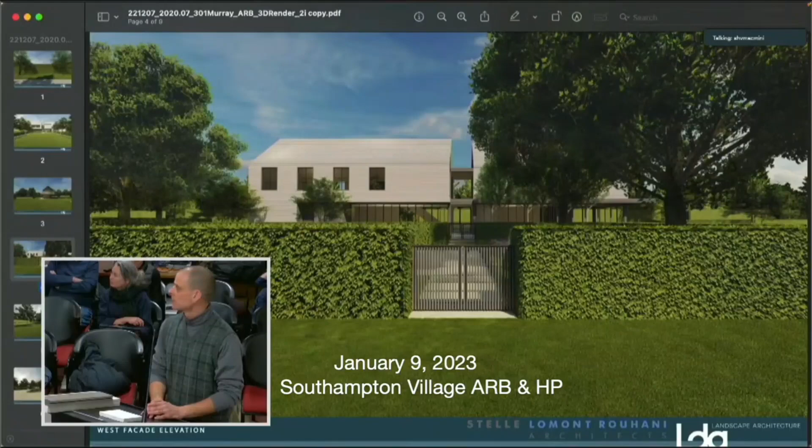Go to the next slide. So this is the view from the west. You're actually looking from where the hedge would be, and there's the pool enclosure, and looking back towards the west facade we do have glass on the first floor. Those would be hinged doors that open up, allowing the view and the breeze to come in. Upstairs is where the bedrooms are, and again that's the same material, the clay that's wrapping up and over.

Next slide. So this is the north. We have a lot of really mature trees - I believe they're linden trees - and it was very important to the client to keep them. They're beautiful trees, linden trees are gorgeous. I believe there's two in this entry court, so as you come in, you go around the driveway, and the house is pretty well tucked behind them.

We have some existing condition photos too. As you enter, you don't really see the house at the gate, you have to come around the driveway, and you're presented with these beautiful trees, and then the house is sort of tucked in behind them. Go to the next view.

What about exterior lighting? I don't see anything on there. We've been kind of getting away from that. Of course we'll have the lights over the doors that we're required to, but we haven't been doing that much ambient lighting on the exterior.

Interesting. So this is the new - as part of that proposal, it was listed there as a new driveway. So this driveway up until that parking court is existing, it was redone this past summer. And that parking court that's getting added is added to allow for this new design, parking.

They would come through - I believe there might be one more rendering of the entry. Yeah, there we go. So that parking court you saw is just to the right of this, which would be the north. So you park, and then you come through this path, and they'll do the landscaping there, and it allows for a nice, beautiful entry.

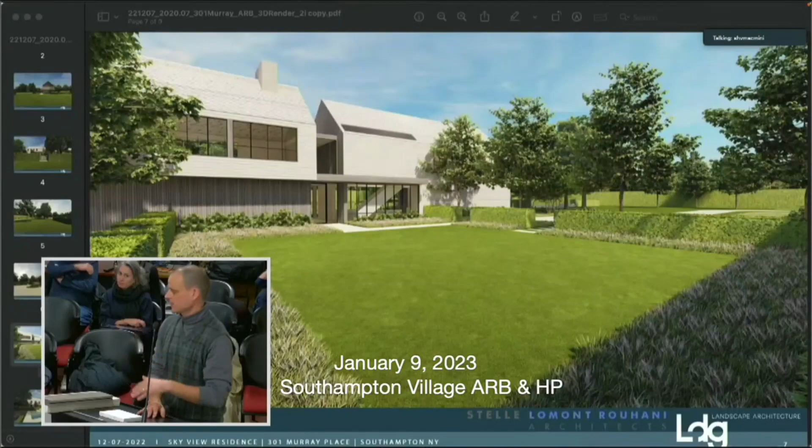So we have that beautiful hedge around 3 sides, but on the 4th side, at this time, they'd prefer to not put it. Okay, thank you.

Will a landscaping plan be presented as part of this submission? I believe they're here. We could wait, unless you want to see it now. Why don't we comment on the architecture, and then we'll go to landscape? I think that's a good idea, John.

So one of the reasons we have the glass - of course we were concerned about the neighbors - and the pool is there. We're proposing to make the pool a little bit smaller, more conforming as well. So as you exit the west side of it, we have the glass there because there's a little dining court, and then you have the pool, and then 3 beautiful linden trees right there as well.

What's interesting is this becomes part of a collection of very contemporary homes in that area, and hopefully 50, 60 years from now, someone will be looking out for the protection of those houses as well. We hope so.

I'm fine. Okay. Jeff? More than that, it's cool, it's stunning, and it's simple. Jane? Pleasantly surprised again?

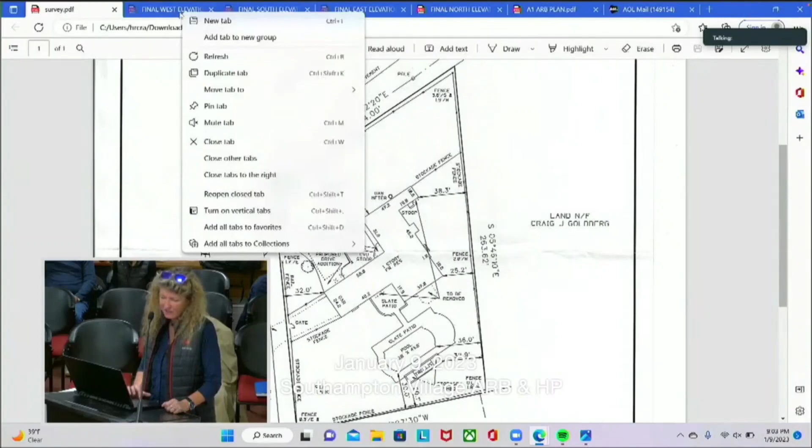Our goal is to move the garage doors that currently face Pierpont and put them around on the north side of the house, thereby closing off that second driveway. You can see that on the west elevation, the removal of the doors.

There's also on the south side of the property a little one-story gazebo-type flat roof structure that at some point was built. We would like to remove that as well. We'll also be removing a chimney and fireplace on the south side of the house, and our goal is to create a little 55 square foot entry foyer.

The entry is kind of in the corner of the two wings, if you will, and it has a flat roof currently with a little railing on it. So we'd like to make that interior space - that's about 55 square feet. So the west elevation is basically a change in...

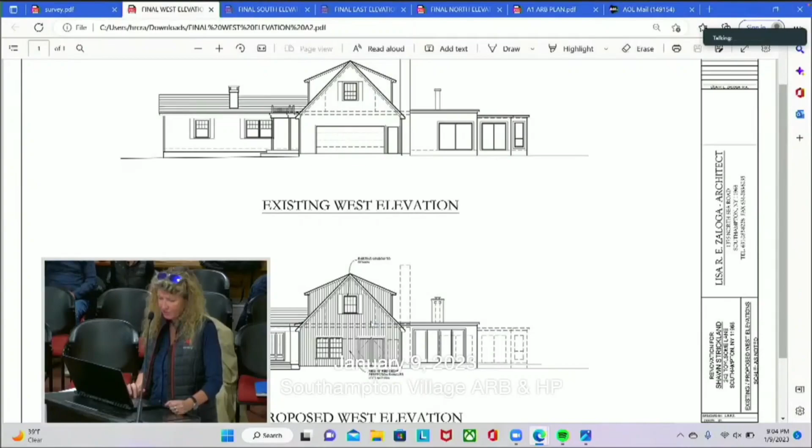...the relocation of the garage doors. If I can - I don't know why I can't make it - there we go. The south elevation: this is the chimney structure that we're removing, and we're going to open it up with a 4-panel door and some windows. Then you can see that little one-story gazebo room that was added.

We're going to remove that and have three pairs of double-hung windows there. There's also a little bay window off on the end of the building - it's kind of a very rambling structure with a lot of jigs and jogs. We'd like to get rid of that little bay window and a door. That's actually the master bathroom, so we want to get rid of that and just make it a triple window there.

Lisa, did you submit a survey or a site plan? I did, yeah. Do you have it? Hold on... This is the survey. I can also hand you one if you'd like. No, I've got a survey. Did you do a site plan? No, it's on here. The structures and everything were shown on the survey, so I didn't do a site plan.

You can see here he shows where that dotted little piece of gazebo is to be removed, and he's dotted in where that chimney is to be removed, and where that little bay window is to be removed. Then he shows the little addition in the crux of the L shape of the house. You can see where the driveway currently came in off of Pierpont, and we're going to close that up, make it grass, and reconfigure the driveway a little bit to have the garage doors on the north side. It's kind of wonky, a very odd house.

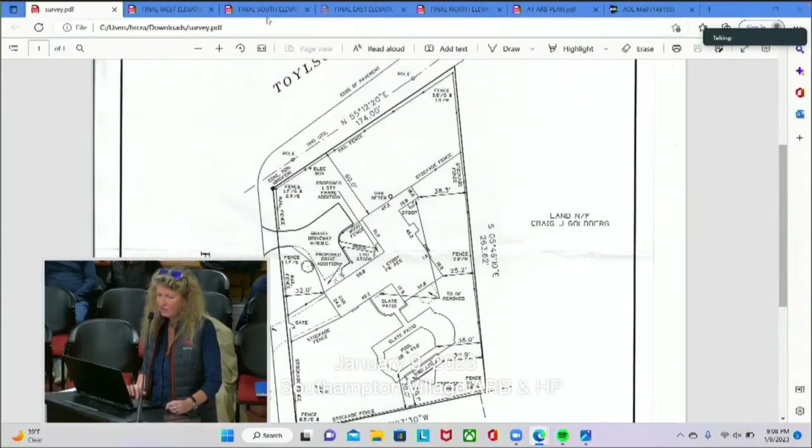Okay, board members? I have no objections, I don't see anything glaring that's a problem. I was going to say, it looks like whatever you do is going to be an improvement. I don't know how to take that, but thank you. That's a good thing, right? So yeah, I don't think I have any objection.

Honestly, it's a little hard to understand without the plan, but now that I've seen the survey it makes a bit more sense. You should have the plan too. Yeah, just a survey. It's the lot itself that makes the house kind of interesting - an odd-shaped house, the way it sort of wanders around. It was added on to quite a few times in a rambling sort of fashion. One of the houses on the street is situated like this.

Okay, public comment. As there are no objections from the board, I'm going to move that we accept the application for 242 Toylsome Lane for a 1-story addition and demolition of a sunroom, chimney, and bay window. Do I have a second? Second. All in favor? Aye. Aye. Aye. Thank you, thanks Lisa.

Have fun. You too. Okay, so next up, we're down to driveway gates, 70 Great Plains Road.

Good evening, board members. I'm Lauren Reisner, I'm here with my wife, Mimi Reisner. I have affidavits on this - they're in order. We worked very hard on this. Okay, it's done, thank you.

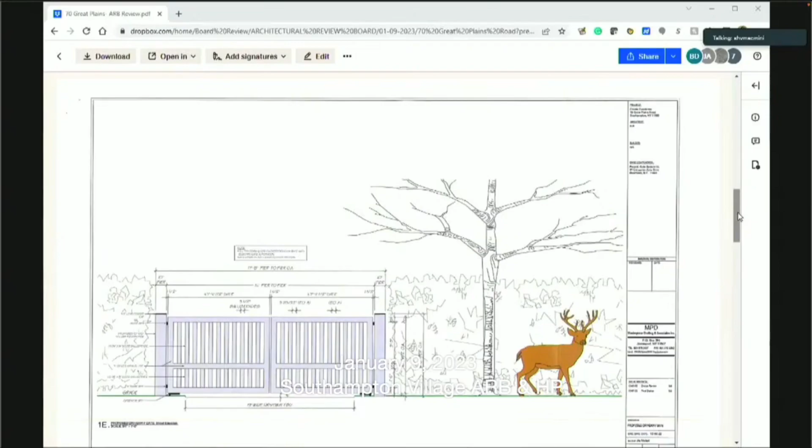Thank you. John, any questions? No, I think it's fine, based on the size of the lot and the transparency of the materials - very simple. That was 1.827 acres. Okay, Jane? No objections from me.

I have to say this, as you know, we started a policy where we're trying to get gates to be shorter, and our policy is we like an average height of 4.5 feet. In this particular case, given the size, we adjust a little bit, and since this is a 2-acre property and the scale of this gate to the scale of the house, the board feels it's appropriate, but I want to put that into the public record, because what we're trying not to have Southampton become is a world of privet fences and solid gates that people can't see above. We like to maintain the open feel that we are Southampton.

So we'll put that out. The color? The color is mahogany - natural mahogany, I believe. No, we plan to paint it white. Oh, it's white, okay. Or perhaps - I've also brought this, this was our other question for you.

I would love to - we're deciding whether to paint it white or dark green. Here's the color, may I approach you? Of course.

What I'm also going to say here is, you guys determine which one you think is best, and tell us which one you prefer. This one - we prefer this one. Okay, as long as it is - which one is it? The bottom one?

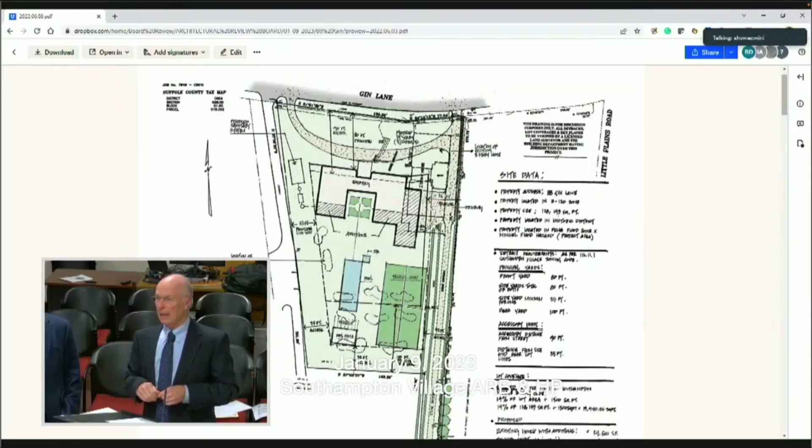One of the things that was really interesting - and I don't know those of you that came in by car - your gate code requires gates to be 18 foot off of the pavement and swing in. The building is 18.1 feet from the property edge, so the gate... Yes, but let's be fair, you have all sorts of frontage down Gin, you could simply move the driveway. And in this site plan, we show a second entrance, but there is a lovely colonnade of trees that goes down that, and in your file you have pictures of that.

Would you like me to go further into the GFA and all that? Sure. So then, the GFA current is 8,882. The allowable GFA is 14,314. We in fact are only building 12,150. We could expand it 2,100 square feet more than we're actually building.

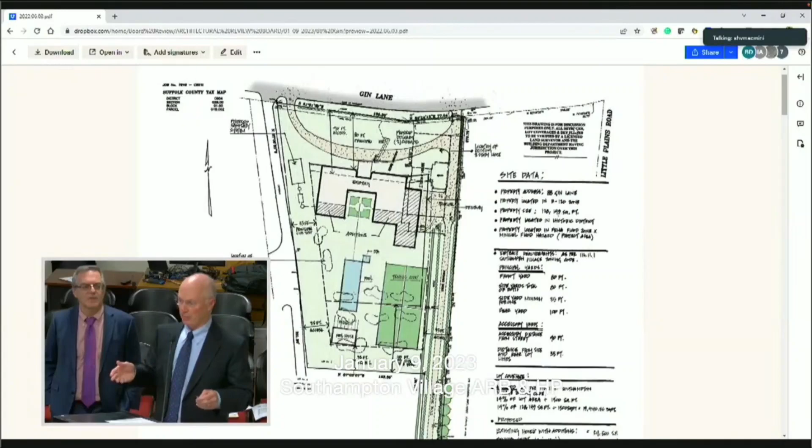I wanted to touch base on moving historic structures, because that was an issue everybody discussed, and I understand. 41 Gin Lane, Sunnymead - my office and your board approved for us to move that building. 5 Gin Lane, which is the windmill - we're all familiar with the windmill in the village - that was originally built in Shelter Island. It was then moved to Hampton Bays as a working windmill, and then it was decommissioned and moved to 5 Gin Lane in 1880.

249 South Main Street, the Halsey House, perhaps the oldest house anywhere - that building was rotated on its property in 1730. The Pelletreau Silver Shop was also rotated, in 1890, to face Main Street. Rogers Mansion was also relocated. To the best of my knowledge, all those buildings still have their landmark status.

We had talked about this building - the village isn't going to allow a 16-stall horse barn ever again in the village, so it's about repurposing it. And the best way to repurpose this and make sure that it stays around forever, not just a couple hundred years, is to rotate it, put it in a proper full basement, in a conforming location, and preserve as much as we can. When we went through the building, we talked about how we plan on preserving the windows and as much of the structure as possible. The structure's in good shape, but the foundation is falling apart.

I think maybe just for Ms. Claire's benefit - the rest of you guys remember this too - there's another unique aspect of this, which is that when this property was subdivided into 3 lots, there was a condition put on by the planning board that you have to move this building. Subsequent to that, the owners at the time tried a couple of different things to demolish it and get it off the property. And the reason the planning board had said that was, you're not... When was that?

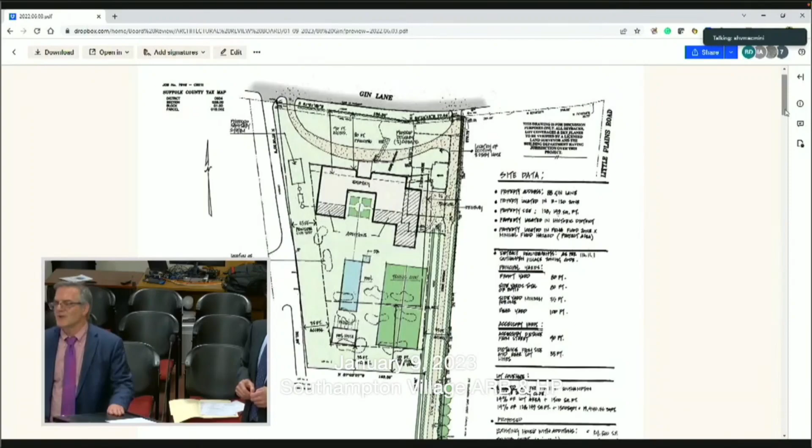The exact date, I had it the last time I was here. It's probably 30 years ago. Yeah, 30 years ago. I wasn't on that planning board then. The planning board had, I think our attitudes about those kinds of decisions have probably changed in 30 years. I'm sure they are.

There was this tension between the planning board saying you have to do this, and the ARB saying we're not letting you take that building down. And what's happened since then is nothing. The building's just sat there.

We now have a client who wants to do something with it, wants to preserve this building in a practical way. One of the things said to the prior owner who wanted to demo it was, you haven't shown that you can't repurpose this. So that's what we're really trying to do - repurpose this building, save it, take the facade that's really spectacular. It's really one of the whole reasons we wanted everyone to see it. It can be, especially if it's tidied up a bit, going to be spectacular.

What we're here for, on this informal basis, is a concept - if there's a hard no from the board, it's not worth us going through the expense of getting these plans in final form. We want to know if we have at least something from you saying we will consider this application - not that we approve it, but we need something to justify that we can take it to the next step. It's a fair question for an important structure, so let's proceed.

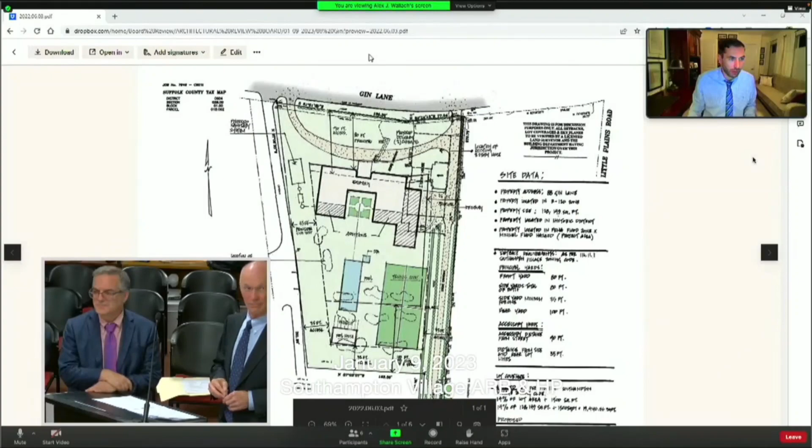Maybe shut off your video. All right, I'm gonna... Okay. Yeah, he's gone - can you hear me now? Yeah, much better, okay great. Oh, nope, for a second. All right, I guess this is too painful for 9:45.

I think the answer is that Sarah's trying to set us up with someone from the state to talk about the rules and considerations for moving historic buildings, if we move it - to get a little more background on this, to be honest with you. The bottom line also being that they can be relisted. Yes, they can be - but we need to understand the criteria for it.

I understand your plight, and I understand both sides of the argument. So where does it leave the applicant now? We've now had a second pre-submission conference, the purpose of which very obviously being: are we moving it or are we not moving it? We have four board members waiting on a fifth. What I'd say out of fairness is I think we need to give Jane some time to go down and walk it, to understand how she feels, so she can give you that answer - because we do have a new board member.

And I think - moved my house. You did. I did, I moved my house, yes.

So 1898, Nathan Howell built it - the Old Hildreth House.